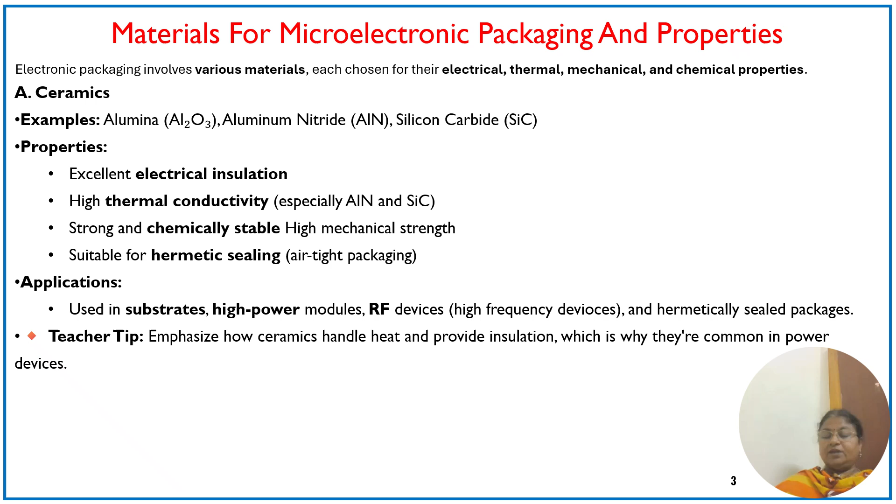So ceramics possess very good electrical insulation, high thermal conductivity, are chemically stable, and are hermetic. Hermetic is nothing but a tight seal. They are used in substrates, high power modules, and RF devices, where we can take a common ceramic material and analyze the heat also; the performance would be quite good.

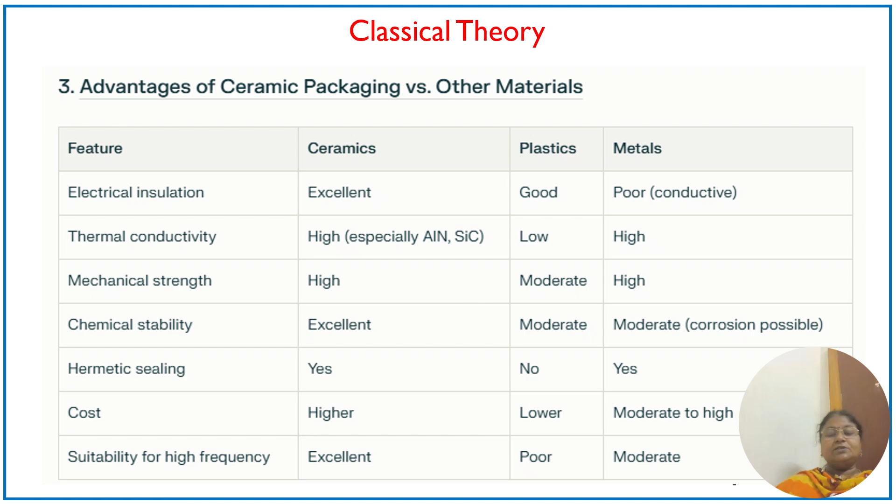And we need to go with a compromise here. We need to compromise the cost. Otherwise, excellence cannot be achieved. So ceramic plays a vital role in today's life. Low temperature profile as well as high temperature, that is your HTCC and LTCC components. So they are used in almost all our designs.

And when you take electronic packaging, alumina will be a very good material which is going to be used for substrate, and nitride combined with aluminium is used for high thermal conductivity, thermocouples, temperature sensors. That would be an example where heat dissipation concern has been taken care of. Silicon nitride, with high mechanical strength and thermal shock resistance, is used for structural components. In silicon carbide, excellent thermal conductivity, hardness, everything is going to be achieved.

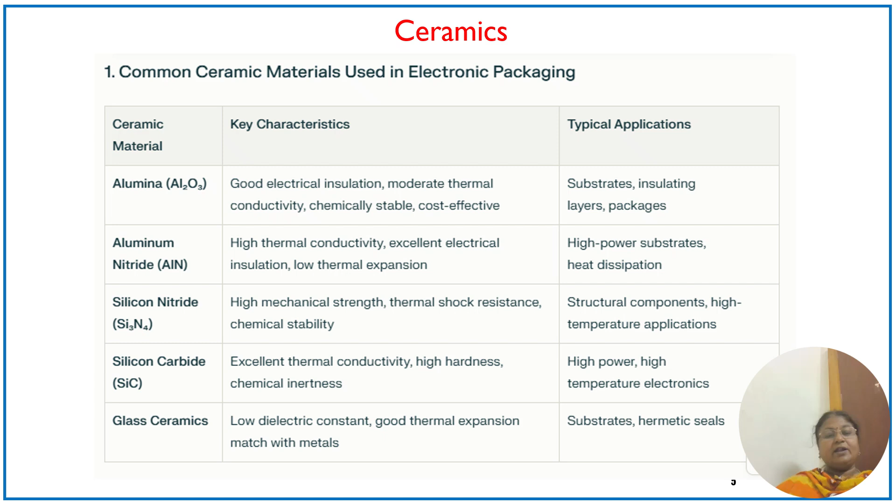And glass ceramic is a combination of glass, the transition temperature of a glass material superimposed with a ceramic material, which possesses a low dielectric constant, and a substrate which is used for thermal hermetic sealing. Electrical properties: excellent electrical insulation, low dielectric constant, stable dielectric properties. So these are the electrical properties, how they are achieved in terms of heat, stability, and tough conditions also.

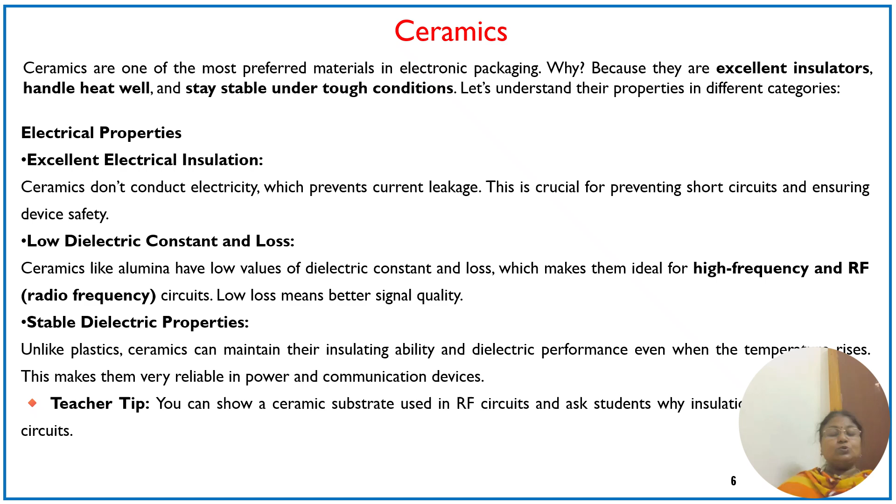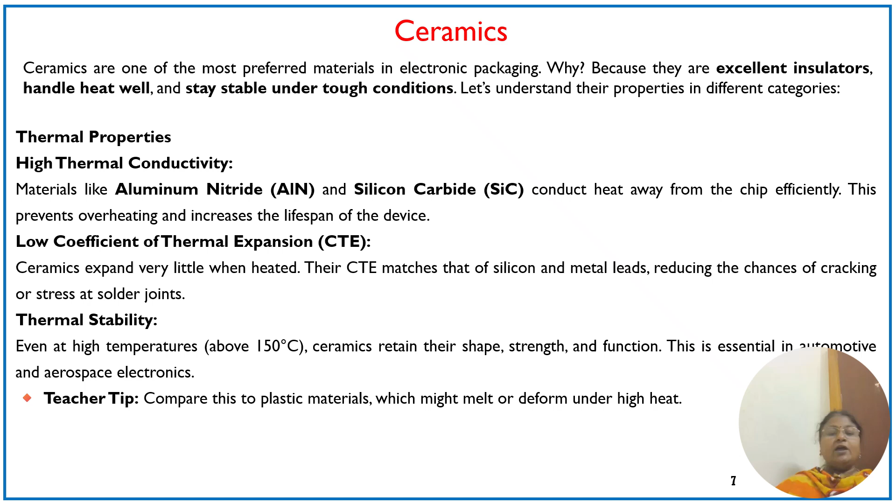Here, different types of designs you can make, and thermal properties are very high, with thermal conductivity, low coefficient of thermal expansion, and thermal stability. Above 150 degrees Celsius also it's going to retain its shape, strength, and function. Hence, obviously, ceramic is used.

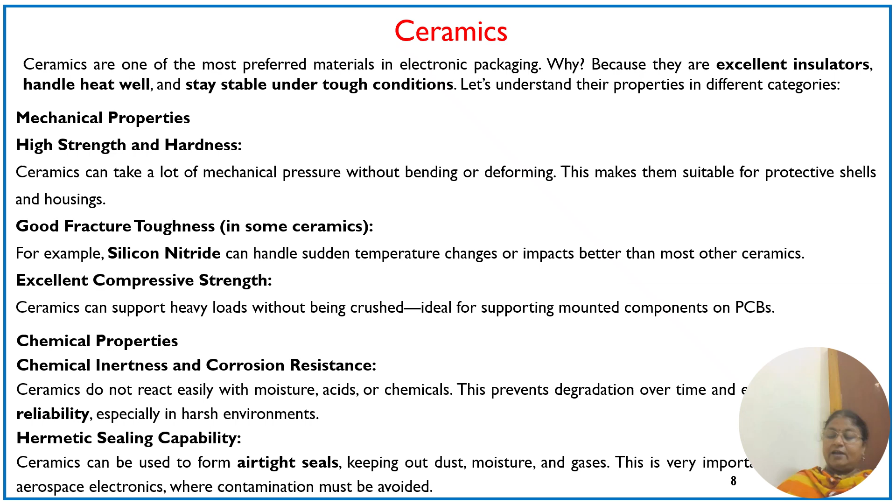Mechanical properties: high strength, hardness, good fracture toughness, compressive strength. Compressive strength has to be analyzed whenever a component is going to be supported or mounted on top of a board, maybe a PCB board. Chemical properties are related to inertness and corrosion resistance. The hermetic sealing capability is for airtight seals, which you can accomplish by means of an adhesive or with a tape.

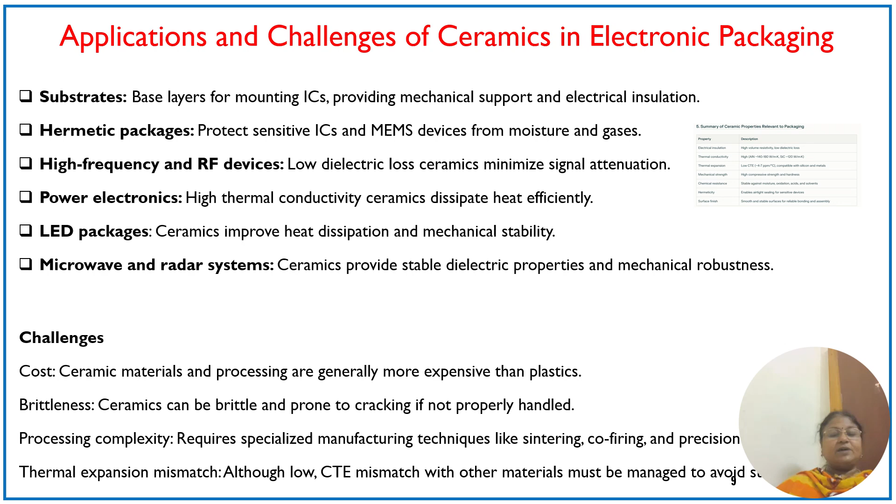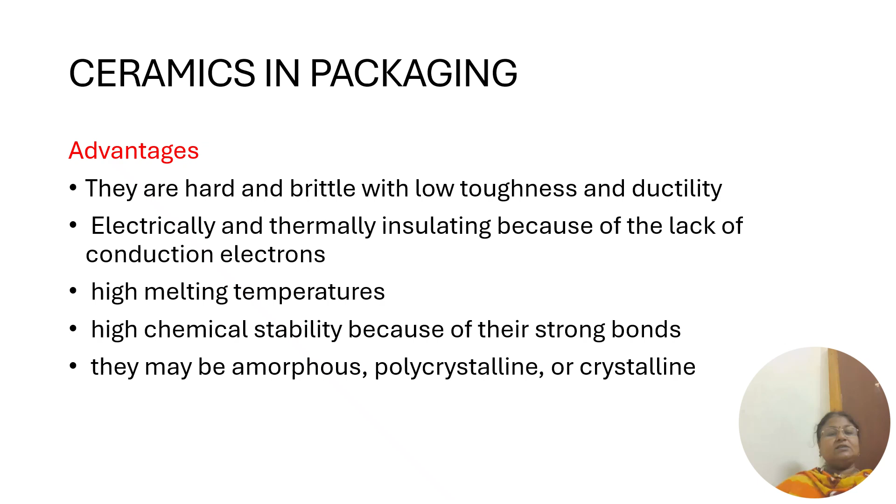Applications: substrates, hermetic packages, high frequency devices, power electronics, LED packaging, microwave and radar systems. If you take the challenges, cost, brittleness, processing complexity, and thermal expansion, if these challenges are overcome, then ceramic is going to be a unique material for packaging. So these are the advantages it possesses, and alumina is going to be the second material.

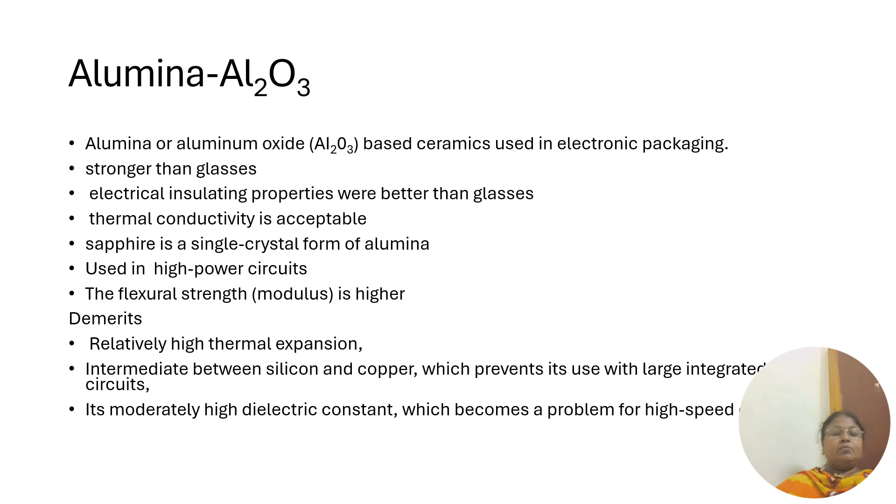Moderately high dielectric constant. And beryllium oxide and beryllia are superior to alumina with respect to thermal properties. In the form of a powder, it is very toxic, so it's very crucial to handle these types of materials. So chemical properties have to be understood. Cost is higher, about 10 times costlier than alumina. So nobody is going to prefer it. Then why is it used?

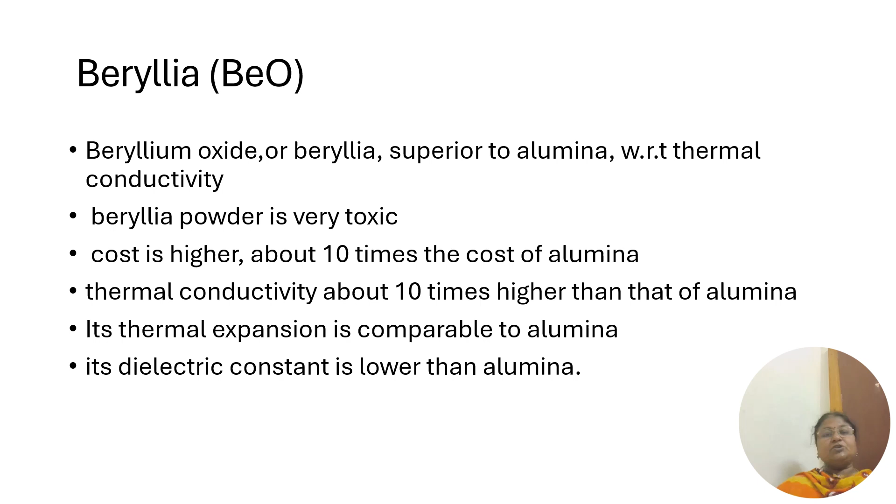Its conductivity is 10 times higher, its thermal expansion is comparable to alumina, and the dielectric constant is also lower than alumina. If you take aluminum nitride in comparison with beryllium oxide, the toxicity level we need to analyze. Thermal conductivity is slightly better, and the thermal conductivity of pure aluminium nitride approaches that of aluminium. Aluminium is a very cheap metal, and it can be made into compounds like aluminium nitride and aluminium oxide.

So it is preferred compared to beryllium oxide, where beryllium is going to be a costly material. In surface roughness, if you compare, and reliability concern also, if you take the exposure to humidity at high temperature, aluminium nitride is going to react with alkaline solutions used in cleaning and plating operations. So that is electroplating operations which are used in the fabrication units.

So aluminium is a very cheap component, so it can form alloys with oxide as well as nitrides, and further it can be used for the packaging unit. So that is the concept. And when you compare beryllium oxide with aluminium nitride or aluminium oxide, the preferable component can be aluminium nitride and oxide only. So that is the conclusion which we can make.

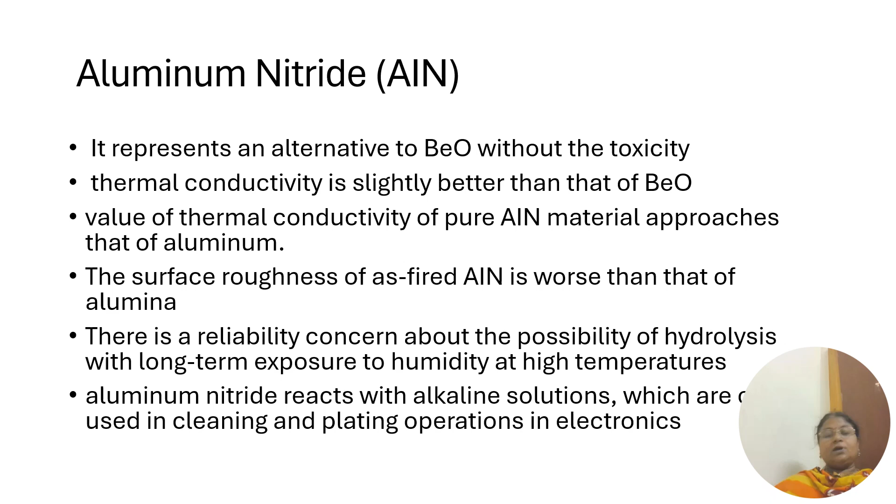And silicon carbide with a small amount of beryllium oxide we call Hitaceram. It's a very unique distinction which we can make. Hitaceram is used in a lot of applications. It's an advanced material also, and it has a thermal conductivity which is twice that of silicon carbide. Even though silicon carbide has a very good thermal conductivity property, twice that of it is possessed by Hitaceram. So this uniqueness in thermal conductivity plays a vital role in a lot of temperature sensors.

So Hitaceram is a very good component which can be taken up for future investigations and also for a lot of sensor designs. Boron nitride, if you take, exhibits three allotropic forms. It can be H and C type. H type is soft, graphite-like in a hexagonal form, and C type is hard with a cubic form. So we know what is cubic.

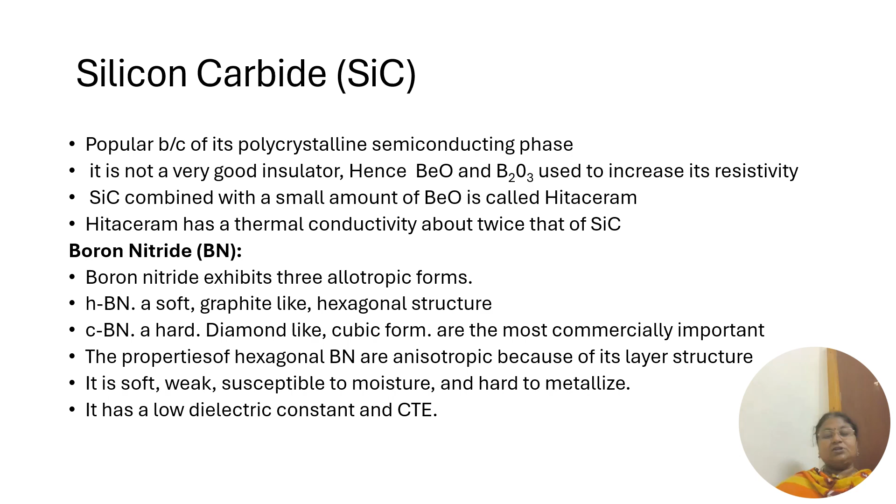And glass, when it is combined with ceramic, it can be used as an alumina material. The crystalline phase is going to possess a high melting point. Dielectric constant is around 5 and it possesses a lower thermal conductivity, and conductivity is going to be very less. They have a good thermal match with silicon and thereby are very compatible with gold and metal. With copper,

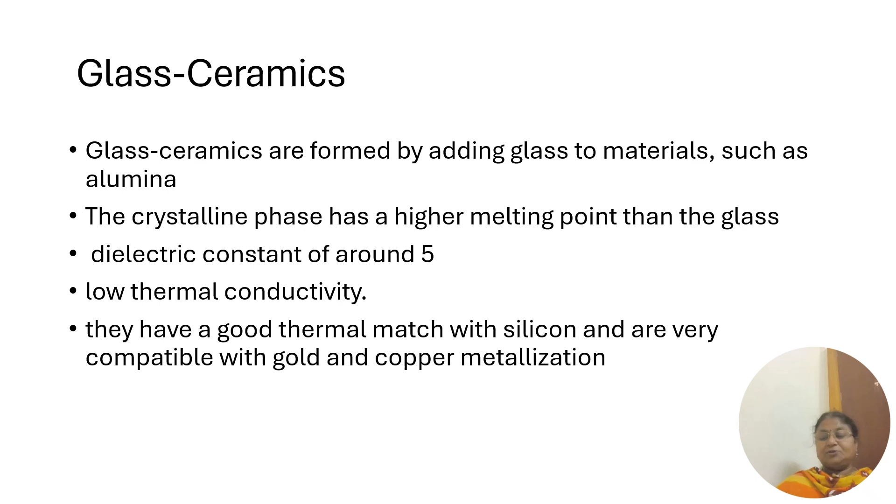metallization is possible, and metals which can be used are copper, aluminium, gold, silver, nickel, tin, steel, beryllium copper. So they possess high electrical and thermal conductivity. And also you see mechanical support and electromagnetic shield. Applications of lead frames in chip designs: you can see the leads. The frames can be made with this metal because metal is a suitable conductor.

Connectors, heat sinks, solder bumps. So these solder bumps can vary in different shapes. They can be radial, circular, spherical. So different forms are available. And in the form of a dot, a circular dot is also a solder. And enclosures can be made with respect to that.

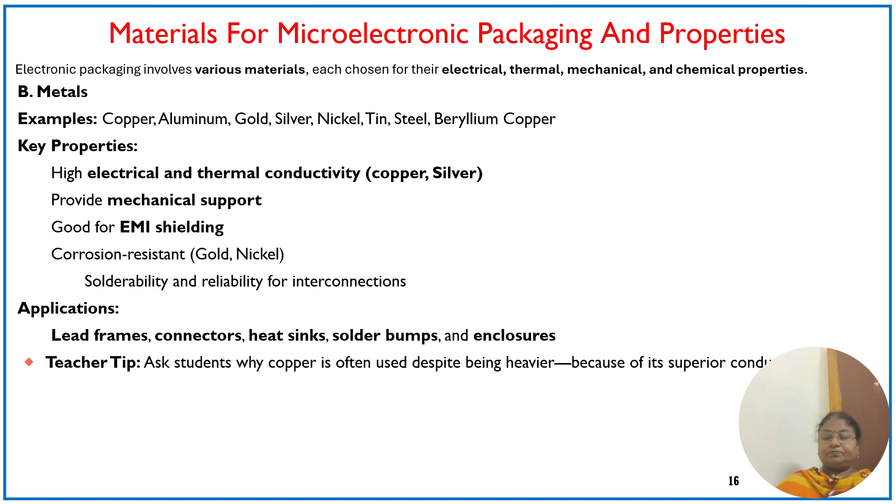A summary table: if you take copper, aluminium, and Kovar alloy, it is a moderate material which can be used for the housing, the packages, and hermetic sealing. And if you take gold, nickel, and steel, they also have a structural property and are used for the enclosure part. So it is corrosion resistant. Different parameters have been analyzed: electrical conductivity, thermal conductivity, CTE, density, and the typical use of each. So this will give you a summary chart which will decide which material you can have.

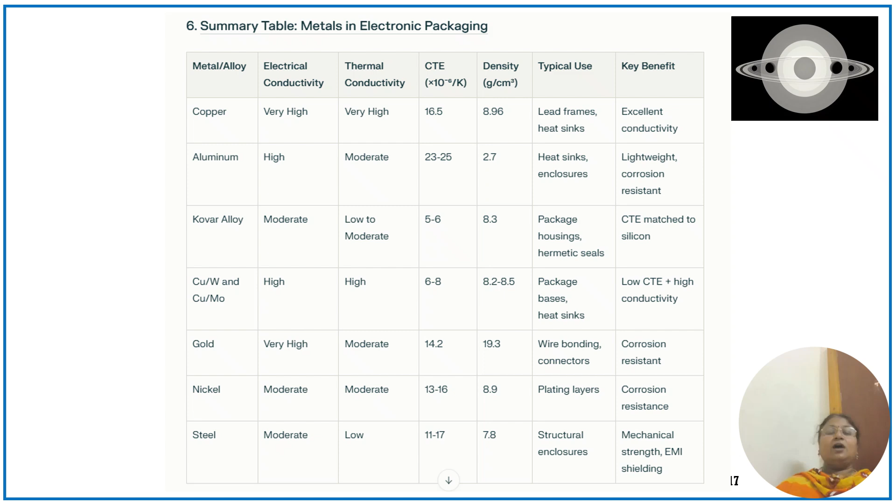Thank you. So thank you for your patience in understanding the material properties. This gave you a simple guideline to pick a typical material and use that material for packaging.